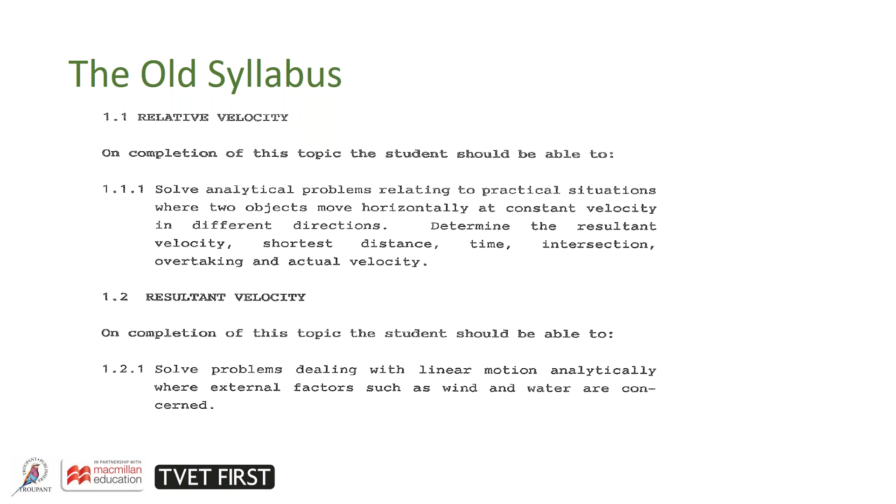Now, the moment we start comparing the new syllabus, if we look at the first part, it gives a general aim. On completion of this module, students should be familiar with solving analytical problems relating to practical situations where two objects move horizontally at a constant velocity in different directions. Students must be able to determine the resultant velocity, shortest distance, time intersections, overtaking, and actual velocity.

Now this, as we see, is what an outcome-based syllabus is. The focus on outcomes creates a clear expectation of what needs to be accomplished. So at the beginning of the syllabus, we have a clear general aim on exactly what should be accomplished.

The syllabus is written in the format of a table. On the left-hand side, numbered, is your learning content, and on the right-hand side is your learning outcomes. And it says students must be able to. So it comes back to the second point: students will understand what is expected of them, and of course teachers will know what they need to teach during the course.

Every learning outcome is clear. Solve problems dealing with constant linear motion analytically, calculate, do calculations, etc. Instructions in the syllabus are very clear. It shows the bounds of how far a lecturer should go when teaching.

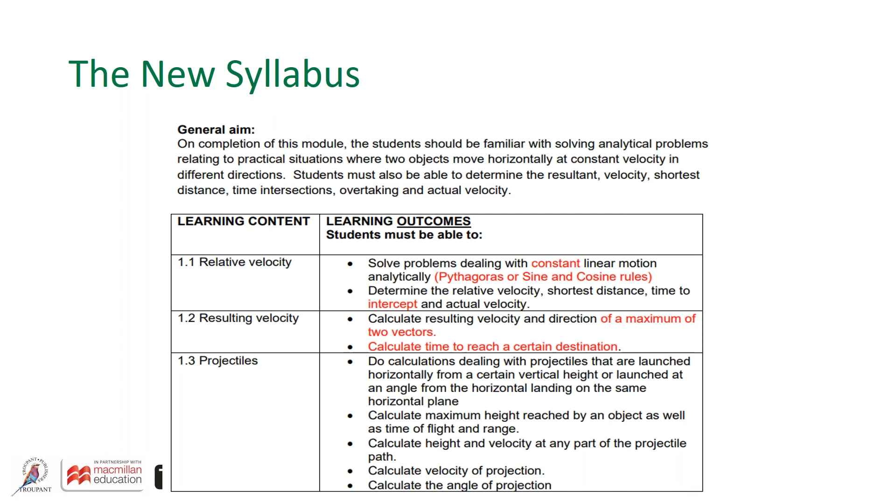The general aims of the new syllabus: students should be able to build on the basic knowledge attained in engineering science N1, N2, and N3. So it is a continuation of engineering science from N1, N2, and N3. Students should understand each basic scientific principle, and should be able to integrate knowledge of various systems and components in their applied subject.

I will speak a bit more on this shortly. Specific aims: to introduce students to apply the scientific principles mastered to his or her specific trade theory, be able to apply SI units and derived units correctly, demonstrate understanding of the subject content through application of acquired knowledge, and be able to solve problems using subject content.

Now, to understand the subject, as I mentioned, engineering science is not a trade on its own. What we are doing here in engineering science N4 is preparing the learners, firstly by building on their knowledge, and secondly by teaching them how to apply the scientific principles and SI units, all in order to use this in the trade they are studying. So if they are studying mechanical engineering, we are setting the basis for the calculations that will be used in mechanical engineering. If they're studying electrical engineering, the same applies.

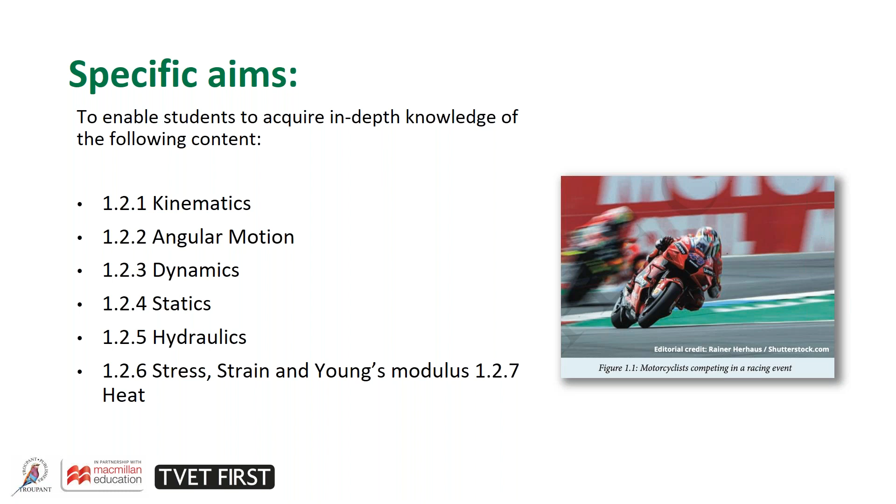Now, comparing the learning content with the new curriculum compared to the old curriculum, you will notice very subtle changes in the percentage weighting, and the names of the topics have not changed at all. Topic 1, kinematics, was 12% of the total, and it's now changed to 15%. Angular motion used to be 9%, it is now 12%. Dynamics used to be 12%, it's now 14%. Statics remain the same at 15%.

With hydraulics, we see a relatively significant drop from 20% to 15%. Stress strain and Young's modulus remain the same at 14%, and heat remains the same at 15%.

So at this point, if you were worried about the new syllabus, whether you should actually be going and doing some further studying in university and stuff, I'm here to tell you that's not necessary. The topics are the same. There are slight adjustments with the nature of the questioning, but the major change in the syllabus is that the outcomes are clear.

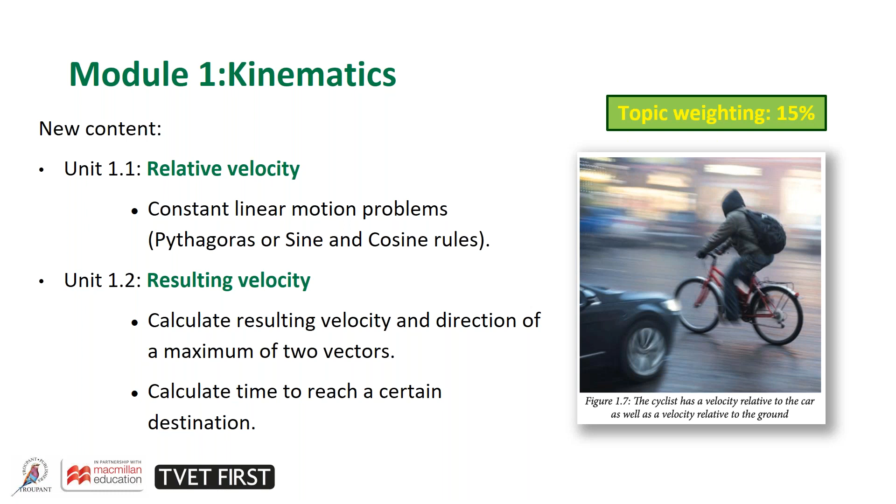Unit 1.2, resulting velocity, calculate the resulting velocity and direction of a maximum of two vectors. Calculate the time to reach a certain destination. Unit 1.3, projectiles. Calculate projectiles that are launched horizontally from a certain vertical height, or launched at an angle from the horizontal, landing on the same horizontal plane. Calculate the maximum height reached by an object as well as the time of flight and range. Calculate the height and velocity at any point of the projectile path.

In our title, N4 Engineering Science, our module 1, we have allocated 32 pages of content for the section. We have 18 fully worked examples, 4 activities, 1 summative assessment, a module summary, and like all our modules, we have video and resource links.

Now, all our topics, we begin with the starter activity and an overview. A starter activity is something that sets the scene for the topic. The starter activity may not be a specific scientific question, but the question encourages thinking about the topic and gives the learner a sense as to exactly what we are going to cover in the topic.

There is a lot of technical terms in engineering science, yes, and for this reason we clearly have definition text boxes giving the definition of a term. Now we must remember, there are a lot of artisans that have been in industry for 20 or 25 years, and they've been sent by their company for reskilling. We consider these people when we are writing the book, knowing that a lot of these terms may be new to them. It would not be fair to go on writing and discussing a term without explaining it.

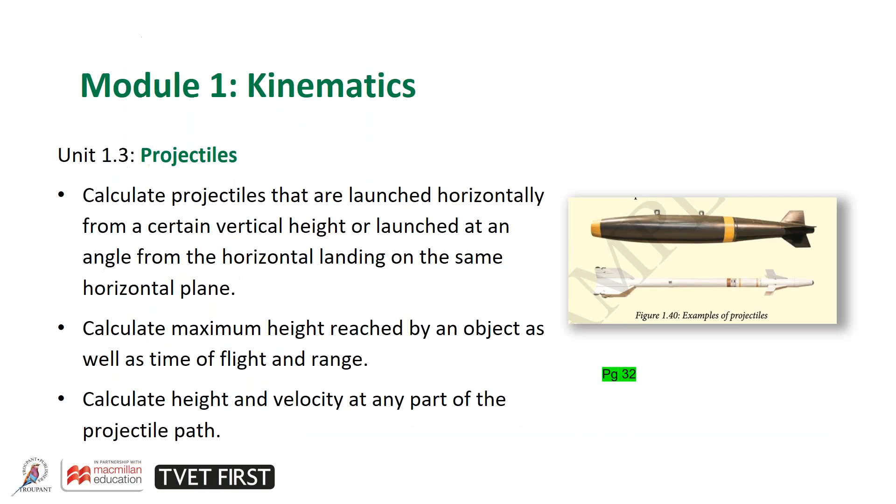Now, coming to this point here, 18 fully worked examples. It is very rare in an engineering book that you will see so many examples. But the vision that we have is that we do not want to leave work for the learner. We want to give the learner as much of the examples as we possibly can. We do not want to do the situation where we do two examples and say the rest you just need to change the subject or formula, or change this value. That's not what we intend. We intend to give as much knowledge as possible to the learner.

In doing this, as a lecturer, we are giving you maximum support. You do not have to have our book and go and do other research and find other examples. We are covering with these 18 examples in this topic most, if not all, of the scenarios. And if you look at our solutions, there are no spaces in between. We're not leaving parts to skip steps and just get to the final answer. No, that's not what we are doing. We are giving it step by step. We are breaking down the calculations. Further, we are even graphically representing the answers. Our aim here is for the learners to pass, and in doing so, we are also giving the lecturers the support.

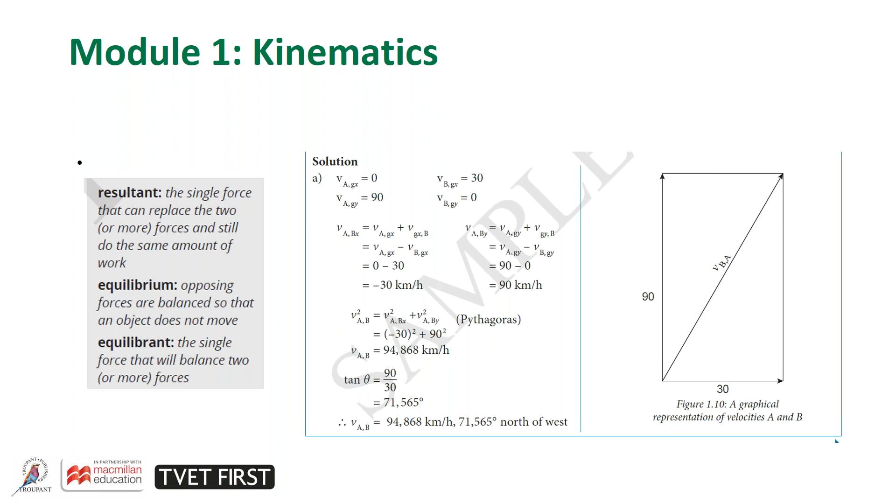Looking at Module 2, Angular Motion, new content, Unit 2.5, Torque, Work Done, and Power. Calculate accelerating and decelerating torque if the moment of inertia of an object is given.

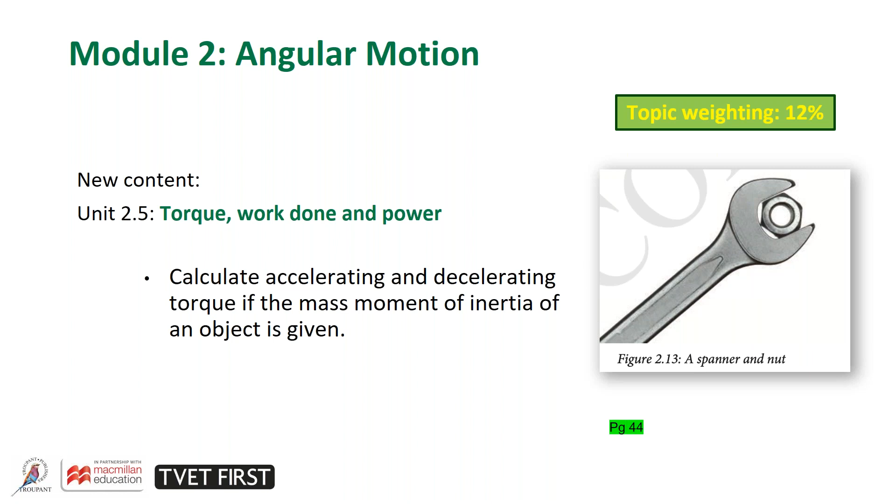There is 18 pages of content in this particular module. It is 12% of the total weighting. There's 8 fully worked examples, 3 activities, 1 summative assessment, 1 module summary, and of course video and resource links.

You will notice in this module and throughout the book, we have photographs of the various objects and things that you would find in this topic. Bear in mind, some learners have never seen a flywheel in their life. It is our duty as lecturers to do our best to demonstrate, to illustrate, and explain exactly what a specific thing may be.

I've also just extracted a picture, a diagram from the module, and you'll see that throughout this book, and particularly in this module, we are explaining by means of diagrams, by means of pictures and graphs.

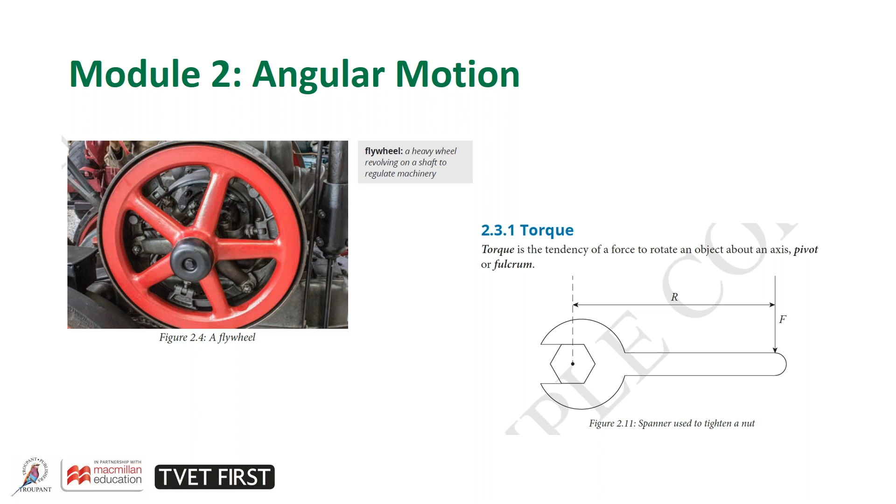There's 3 activities. Now let me touch on these activities. These activities are strategically placed in the module. We don't expect as a lecturer and as a student to go through the whole module to keep learning, and not actually assessing yourself. These activities are strategically placed at intervals where we can test the learner to see how far the learner has come and whether the learner understands.

The activities are in the student book in the form of questions, and the answers are in the lecturer's guide, which I'll touch on later. The activities is a good instrument for you to measure the progress of your learners. It can be used to see whether learners are coping, whether some sections need to be retaught, and it can even be used by you as a lecturer to base your questions when you are setting tests.

Module 3, Dynamics. Unit 3.1, Newton's 3 laws of motion. Apply Newton's second law of motion. Sketch free body diagrams of vehicles traveling on horizontal or inclined planes while moving at constant speed, accelerating or decelerating. Calculate the tractive effort and braking effort required for motion on horizontal and inclined planes with regard to practical problems, including gravitational force, rolling resistance force, and inertia force.

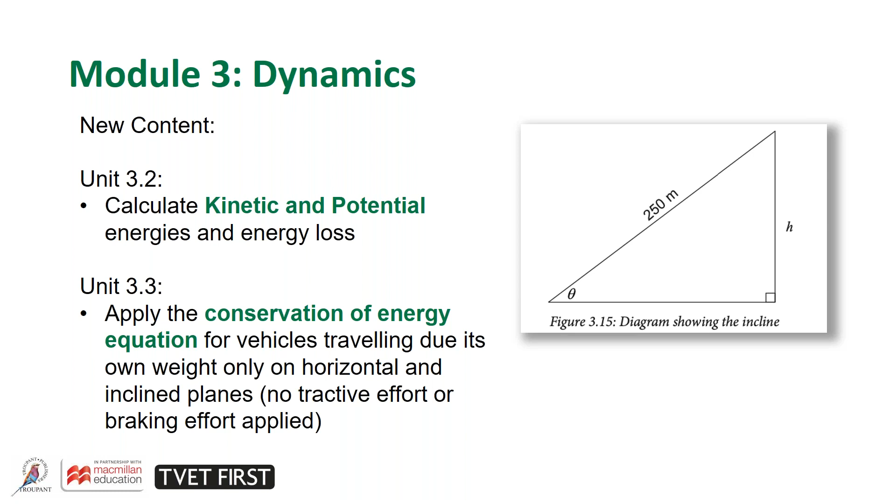Unit 3.2, calculate kinetic and potential energies and energy loss. Unit 3.3, apply the conservation of energy equations for vehicles traveling due to its own weight on horizontal and inclined planes, no tractive effort or braking effort applied.

In our book, when it says sketch free body diagrams of vehicles, you will find that for every example requiring this, we have sketched free body diagrams using computer-aided programs to draw this. We are not leaving it to the lecturer by merely putting the example without the diagrams. We're giving as much possible information for you, the lecturer, and for the learners to grab onto.

There's 24 pages of content in this particular module. There are 13 fully worked examples, 3 activities, 1 summative assessment, 1 module summary, and 1 video and resource link. This topic is 14% of the 100%.

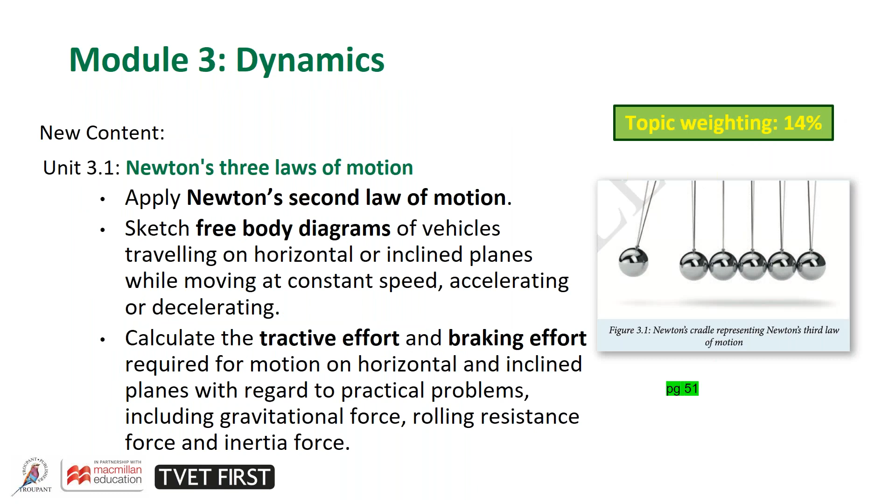I will use this module to explain the concept of the summative assessment. As the activities assess the learners at intervals, the summative assessment is a tool and a test basically at the end of a module. So once you have completed the module, once you have done, in this case, the 3 activities, you now, as a lecturer, can give the learner the summative assessment to do.

Now, the summative assessment will not just cover one particular part of the module. The summative assessment will cover the entire module. And when the author wrote these questions for the summative and, of course, for the activities, knowing that our author has been an examiner for many years, he knew exactly the type of questions to ask the learners to test whether the learning outcomes have been achieved in this particular module.

The summative assessment questions are similar to examination questions. There are marks allocated to each question, and the answers for all of the questions are in the lecturer's guide.

If we look at this, I've taken an extract from module 3 on the dynamics. Apart from teaching the learning outcome, in our book, we also have tips to help solve problems. As I mentioned, our author is very experienced in lecturing and assessing the subject at a national level. So the tips that he is giving here is based on his experience on where learners are lacking or where learners can improve. Like for this one, an example, it says tips to help solve problems, sketch the diagram and indicate all forces. So obviously this tip is based on his experience on what learners have not been doing.

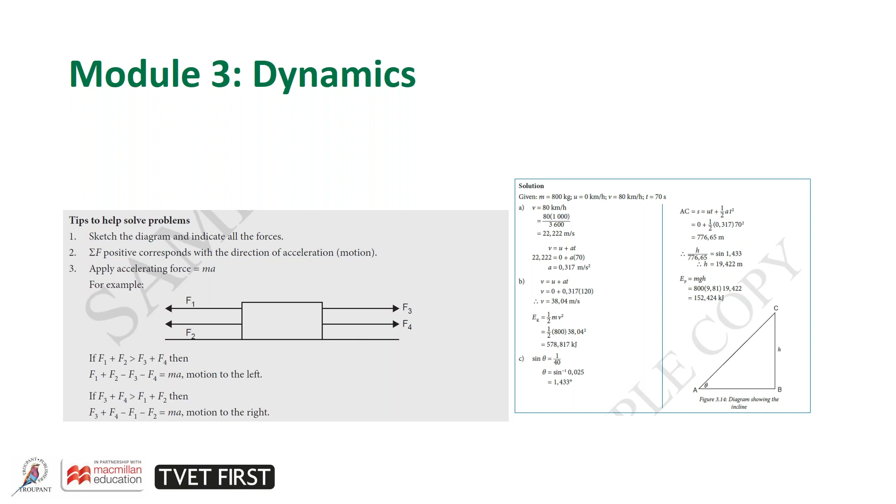Module 4, statics. New content, Unit 4.1, simply supported beams and cantilevers with point loads and uniformly distributed loads. Calculate the point of inflection. This has been moved from N5 to now N4. The topic weighting is 15%. If you look at this module, 44 pages of content is covered.

One of the reasons for that is, considering Unit 4.1, simply supported beams, cantilevers with point loads and uniformly distributed loads, we as lecturers know the combinations of examples that can occur here. We could have an example with point loads only. We could have an example with uniformly distributed loads only. We could have one with point loads and uniformly distributed loads. We could have a cantilever. The combinations here is really a lot.

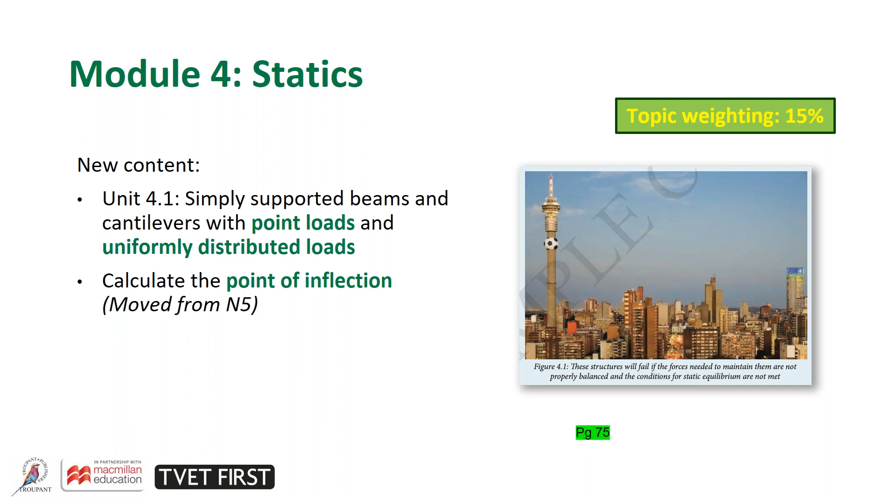So considering this, we have 14 fully worked examples for statics in module 4. And you'll notice our activities for this module has increased to 4 activities, because we know the nature of this particular module. Learners need to be assessed step by step to check their progress. 1 summative assessment and 1 module summary, video and resource links, of course.

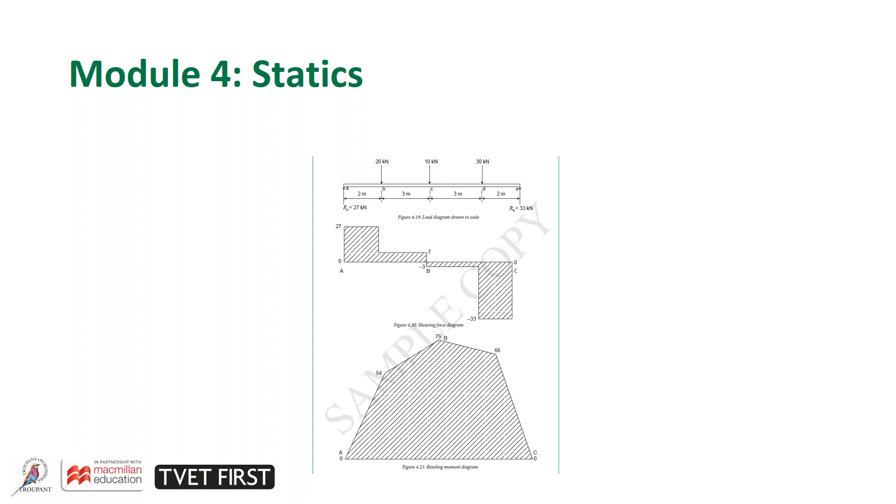Now, what I found in previous engineering books, the shear force diagram and the bending moment diagram was not always done. It was done maybe for one example, and it was left to the learner to figure out the rest of the examples. In our book, we made sure that where required, the shear force diagram and the bending moment diagrams were clearly drawn and in line with the beam. So learners were not lost along the way. Learners were not required to do their own drawings and have nothing to compare it with.

Module 5, hydraulics. Okay, this is the topic that has dropped by 5%. And even though it dropped by 5%, you will notice there still is a lot of content that needs to be covered. 40 pages of content was covered in this module.

Hydraulic pumps: calculate the theoretical and actual flow rate of reciprocating pumps. Calculate the rotational frequency of a pump to deliver a given flow rate of water. Calculate the time taken to fill or empty a reservoir for a given flow rate. 5.3, hydraulic accumulators: name the types of accumulators. State the functions of an accumulator in the hydraulic system.

As many of you are lecturing in engineering science, we will know this is one of the biggest topics that has ever been in engineering science. The fact that it has dropped by 5% of the overall percentage does not really affect how big this particular topic is. Hence, as I've mentioned, we have covered 40 pages of content.

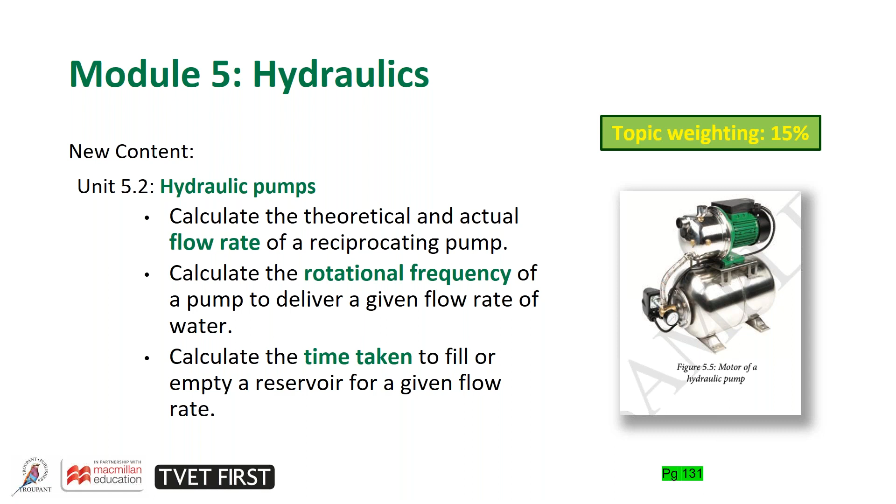But the amazing thing in this particular module is that we have 20 fully worked examples. Yes, that's right, 20 fully worked examples. We understand the nature of this module. We understand exactly how many types of examples need to be covered. And hence, when the author wrote this book, he put in 20 fully worked examples. For those of you who have been lecturing this for many years, we understand the nature of questions that can occur. It's a topic that opens up to various questions, and sometimes we've all been learners at one stage.

We face a point as learners where we start leaving out things because we have to go and look for the answers or look for the examples. It's also for this reason that we have put so many fully worked examples in this particular module. There's 4 activities, 1 summative assessment, a module summary, video and resource links, of course.

Now, this topic is based on hydraulics, which is not something that can be easily demonstrated in the workshop environment in a TVET college. It's for this reason that we have various illustrations. This is just one of the illustrations from this particular module. We have these illustrations to show the learners, apart from talking the mathematics and the scientific calculations based on these hydraulic problems, we want the learners to see and understand what these instruments and machines are.

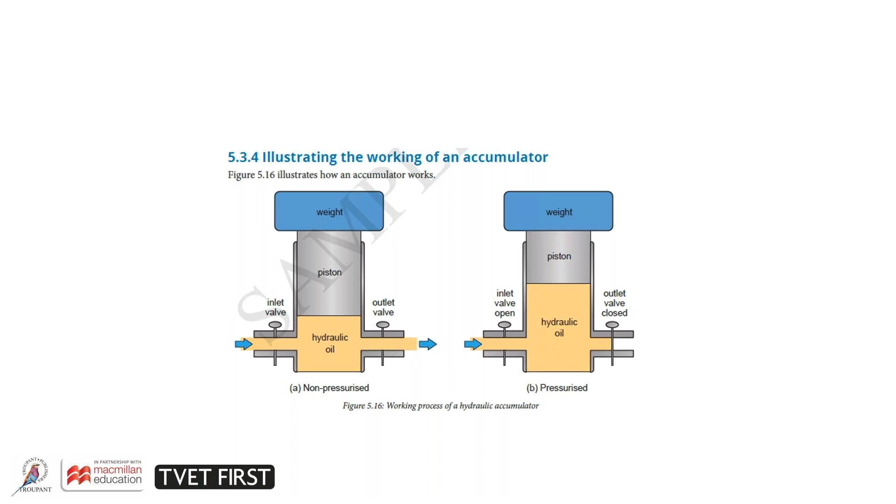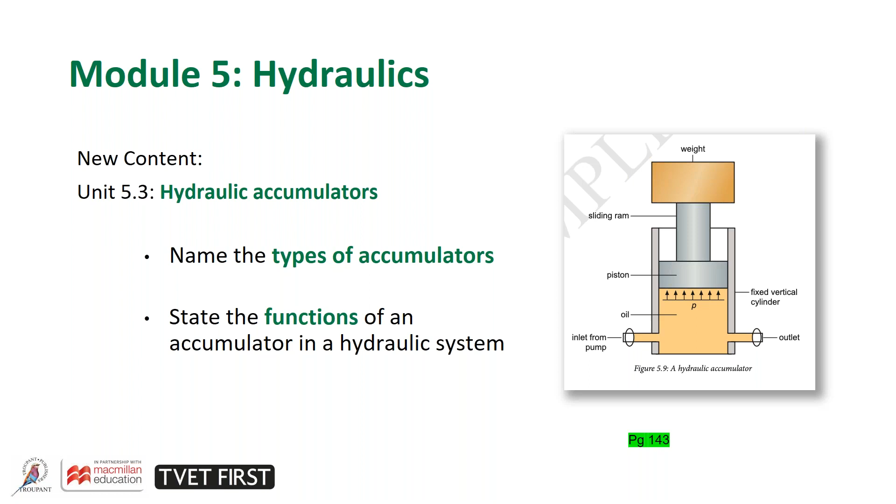In the older textbooks, based on the older syllabus, the drawings were mainly done in sketch, without much detail. But we aimed, even if you look at this drawing, to give the learner as much detail as possible. Because as we know, even looking at this picture here in front of me, calculations are based on the piston, the sliding ram, etc. It makes no sense to write this as a sentence and expect the learner to do the calculations without having a picture of exactly what these machines are.

Module 6, stress, strain, and Young's modulus. The new content, compound bars are now included. Stress types: name the 3 main types of stresses. Calculations on stress, strain, and Young's modulus. Unit 6.2, Young's modulus. Calculate change in length or total change in length for compound rods.

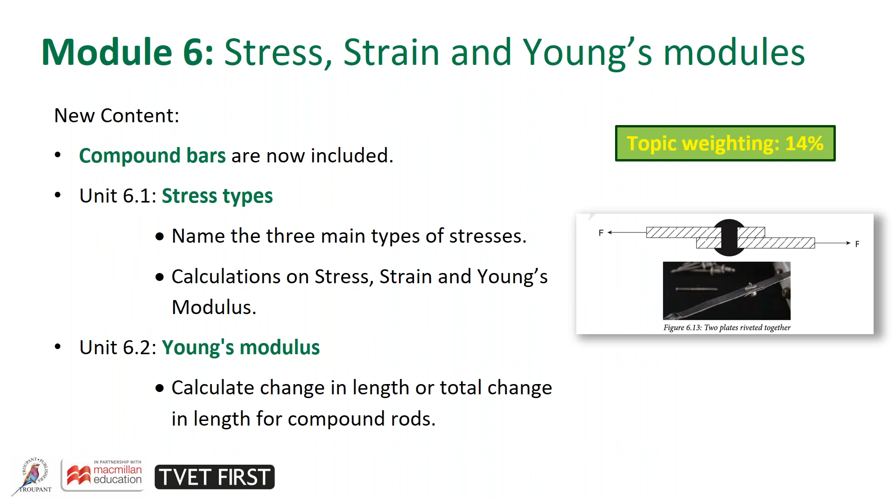It is one of the smaller topic weightings, which is 14%, and it's also a topic that has a lot of calculations, but not a lot of theory. Hence, 26 pages was dedicated to the content of this particular module. There is 15 fully worked examples, 3 activities, 1 summative assessment, the module summary, of course, video and resource links.

Now, what we also found in this particular module is that learners really needed to be shown in a practical way what are the things we're talking about. Like, we often talk in class about a cantilever beam, and we don't understand what it is, or cantilever with a transverse load, for example. As much as we can try to draw it on the board or put a sketch, the best thing would be to see it in reality, and the second best would be to have photographs.

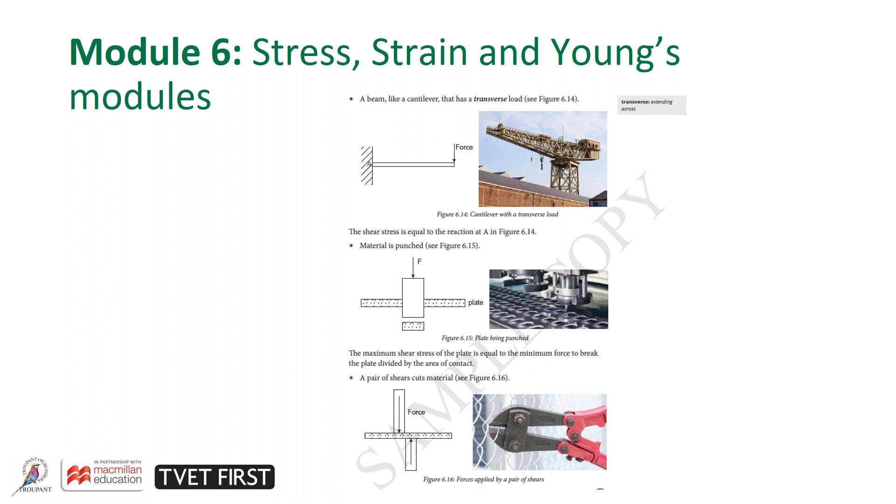In this particular module, there is quite a few photographs. We are trying to explain to the learners practically exactly what we are talking about. If you look at also this example, figure 6.15, when material is being punched or a pair of shears cuts through material. The nature of this module, there is different ways of asking questions, and we have 15 fully worked examples in this particular module.

This would bring us to heat, unit 7.1, volumetric changes in solids. Calculate the volumetric coefficient of expansion given the linear coefficient of expansion. Calculate the change in volume and final volume due to temperature change. Calculate the percentage change in volume.

Volumetric change in liquids. Explain the anomaly in the expansion of water. Calculate the change in volume and final volume. Calculate the change in the level of the liquid in a container due to temperature change. Calculate overflow in a container filled with liquid due to temperature change.

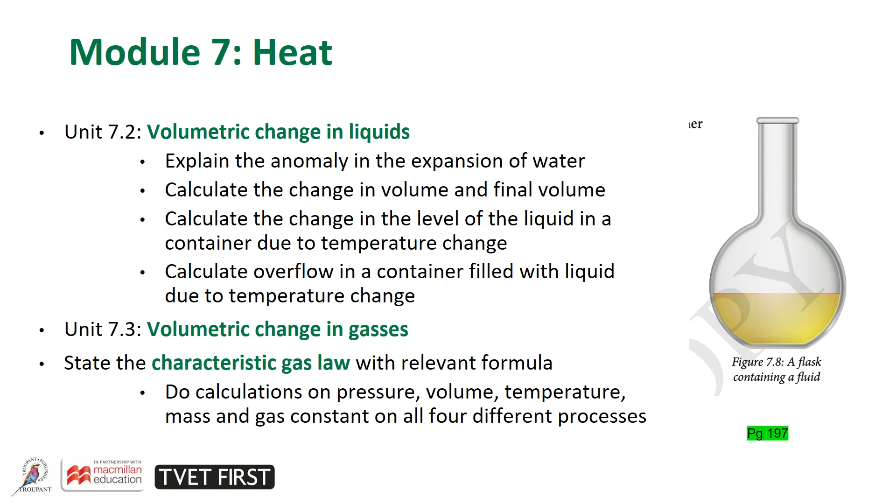Unit 7.3, volumetric changes in gases. State the characteristic gas law with relevant formula. Do calculations on pressure, volume, temperature, mass, and gas constant on all 4 different processes. Gas processes: define the 3 basic gas processes: isochoric, isobaric, and isothermal. Sketch the PV diagrams. Do calculations on work done, change in internal energy and heat flow. Sketch PV diagrams of a maximum of 2 successive gas processes. Do calculations on work done, change in internal energy and heat flow for the 2 successive processes.

Now that was quite a mouthful. I even have to take a deep breath before I change the slide. And for that reason, you will find there are 26 fully worked examples. I will say this again: it is very rare in an engineering book, or any book for that matter, to find as many as 26 fully worked examples. If you look at these slides that I've just read on heat and the extent of the syllabus, this was considered when the author wrote these 26 fully worked examples.

We do not want to put the learner in a situation where he or she is searching the internet or searching some other resources to find answers. For an example, we do not want to put you as a lecturer in a situation of being under pressure, which undermines maybe whether you can teach or not. We believe you definitely can teach. It's for these reasons we have put these 26 fully worked examples in this particular module to make sure that we are covering the syllabus thoroughly.

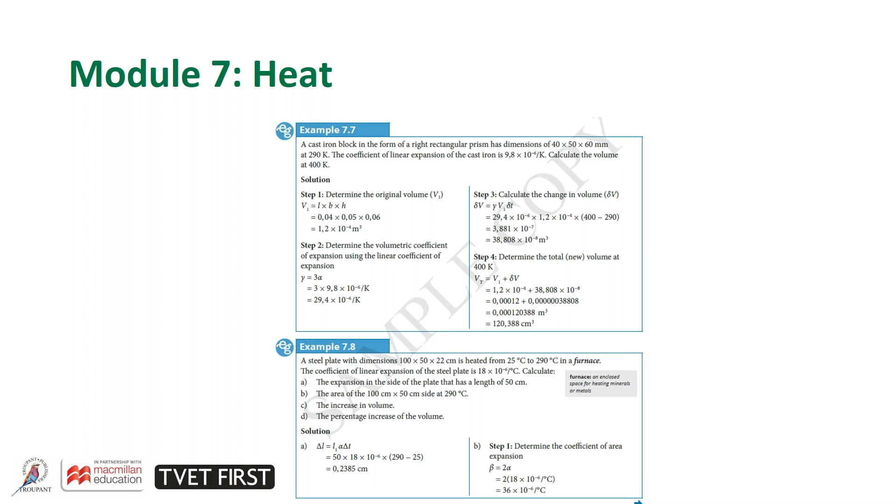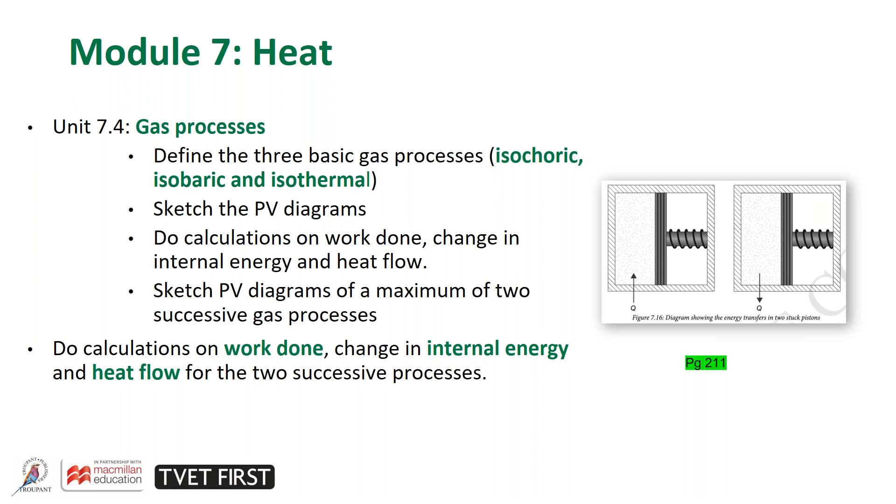For heat, to draw sketch PV diagrams. In our book, we have a lot of diagrams, which makes it easier for the learner to reproduce these diagrams in the examination. Overall, this is one of the biggest modules with 42 pages and 26 fully worked examples.

Okay, that basically covers the content of the new syllabus and how the content was covered in Engineering Science N4. Now let's look at the assessment criteria.

The ICASS trimester mark for Engineering Science N4 from 2022 going forward: 2 formal class tests for full-time and part-time students, or 2 assignments for distance learning students only.

Now, it's very important for me to mention this part about distance learning. There are a few centers in South Africa that qualify as distance learning centers. A distance learning student and a part-time student are not the same thing. A part-time student is a learner possibly doing one subject or not attending all the lectures, but not classified as a distance learning student. When you enroll for distance learning, your code in the enrollment form is distance learning.

Distance learning students are allowed to write 2 assignments instead of 2 tests. Whether you write the 2 assignments or the tests, you have to obtain a minimum of 40% in order to qualify to write the final examination.

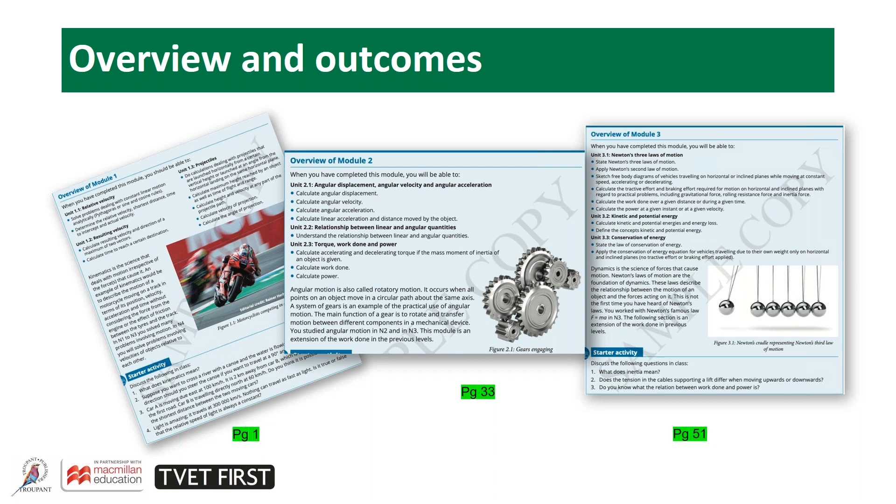Outcome-based learning is a beautiful thing compared to how we were taught in the past. The learner was always in the dark, had no idea what was coming, and had to just stay along for the ride from the beginning of the module to the end. We also have the starter activities, which I will discuss shortly.

Special features: starter activity. The starter activity is designed not to have marks. It's there to immediately encourage and stimulate thinking in the learner's mind. For example, discuss the following questions in class. We're encouraging discussions, we're encouraging learners getting together. What does inertia mean? Does the tension in the cable supporting a lift differ?

Further, in the starter activities, we try to incorporate real-life situations. For example, here from page 1, question 2: suppose you want to cross a river with a canoe and the water is flowing due south. In which direction would you steer the canoe if you want to travel at a 90-degree angle? So in the starter activities, we also try to be very practical. Some of them have diagrams in it. It's very unique in that before you even get into the topic, the learner, just by having a discussion and a quick think about something, already is on track with what the topic is about.

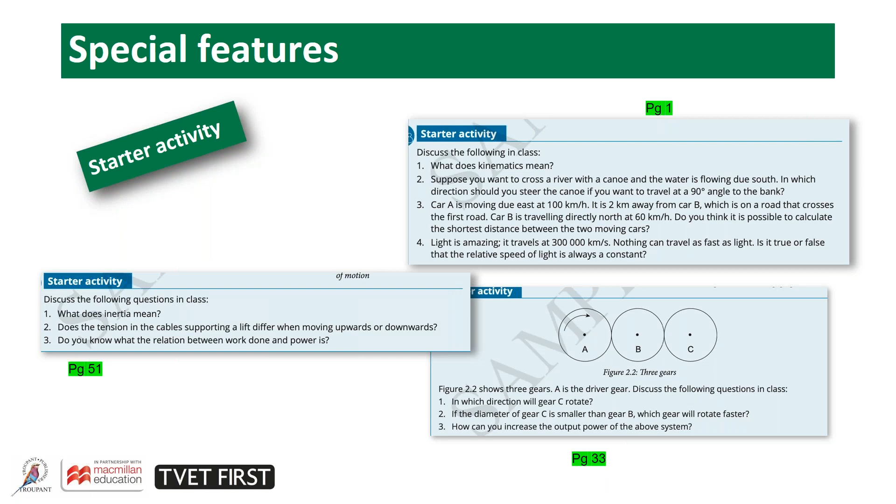Special features: examples with solutions. Now, to me, I studied engineering, as many of you have, and if you think about your engineering books, very few examples were fully worked. That is the truth. University level, even TVET level, the older books, steps were skipped out. We just jumped from the question, one line, and then we were gone to the answer. That is not happening in our book.

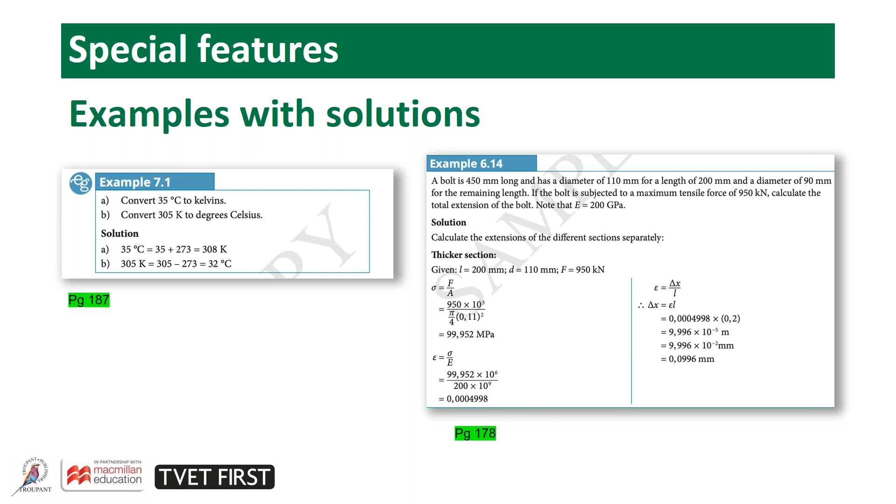This is a great tool for you as a lecturer. You do not have to search for answers for a particular question. The answers are all in the book.

The activities, which I spoke about earlier, are spaced at strategic intervals in the module. For example, activity 1.1 is after you've covered unit 1.1. These activities all have a mark allocation. They are written in the format that you would find in the examination, so it's very formally written. The questions are well thought of, and these questions are all original questions by the author.

At the end of a subunit, you can take this activity and test the knowledge of your learners. And as I mentioned before, you can even use these activities for setting your tests by changing maybe the figures or changing the scenarios a little bit.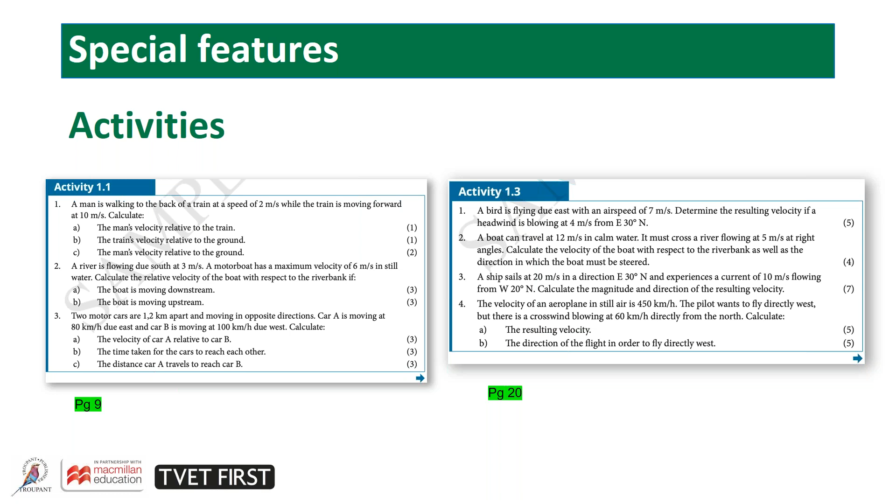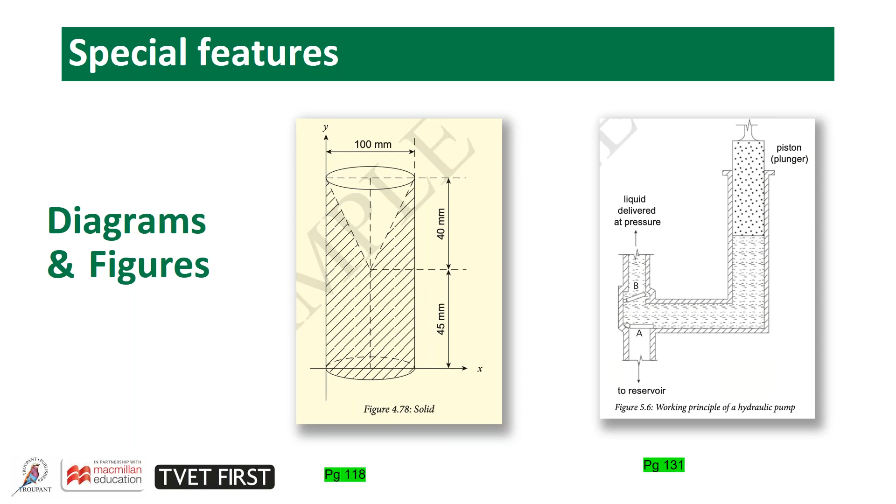Throughout this book we have diagrams and figures all drawn on computer, no ambiguous or vague diagrams, clearly labeled, clearly dimensioned diagrams which were well researched. We understand that learners cannot learn from text alone. Learners need to create a photographic memory in their brain, and these diagrams and figures help to achieve that.

Throughout the book, apart from the diagrams and figures, we have real photographs of real situations to further help the learner understand and also put the learner in a practical situation. When we talk about a question, for example, calculating which way should the canoeist row, it's good for the learner to have a picture of a canoe in water to understand exactly what the question is asking.

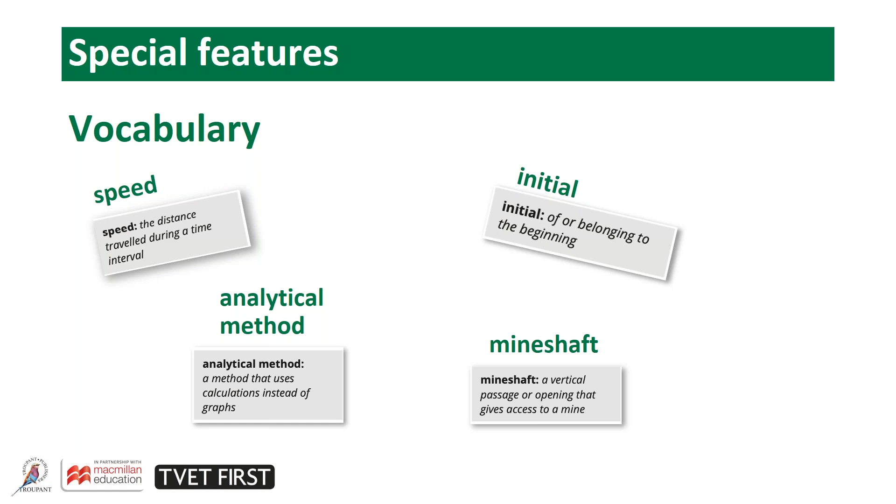Throughout the book we have definitions of terms, like speed: the distance traveled during a time interval. So the learner doesn't have to wait and read the whole module and go back and search in a paragraph, where did I see speed? No, these text boxes are placed throughout the book. It's also something that is very rare in an engineering book to find all of these definitions just popping up. But we know as lecturers, it's very important for the learner to understand exactly what a term means in order for them to do any calculations based on these terms.

Our author, as mentioned, has been an examiner for many years and has put in exam tips throughout the book in every module. For example, this exam tip in the middle: always write down the original formula first, then manipulate, then substitute in the given values.

The author has great knowledge of where learners went wrong in exams in the past and knows exactly what is required for the learner to perform well. These exam tips throughout the book will really help the learner, since sometimes a learner forgets the smallest of things, for example, that a radian is 57.3 degrees. These tips will help not only the learner, but you as a lecturer while teaching, to remind learners of these particular points.

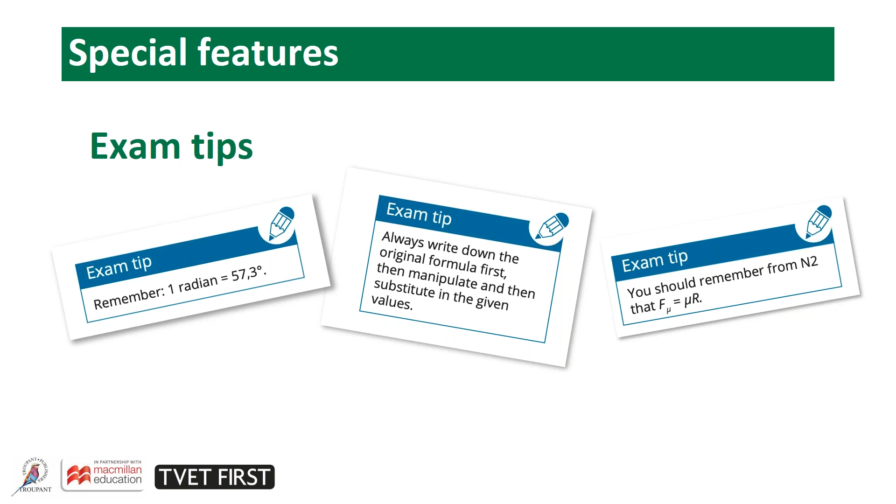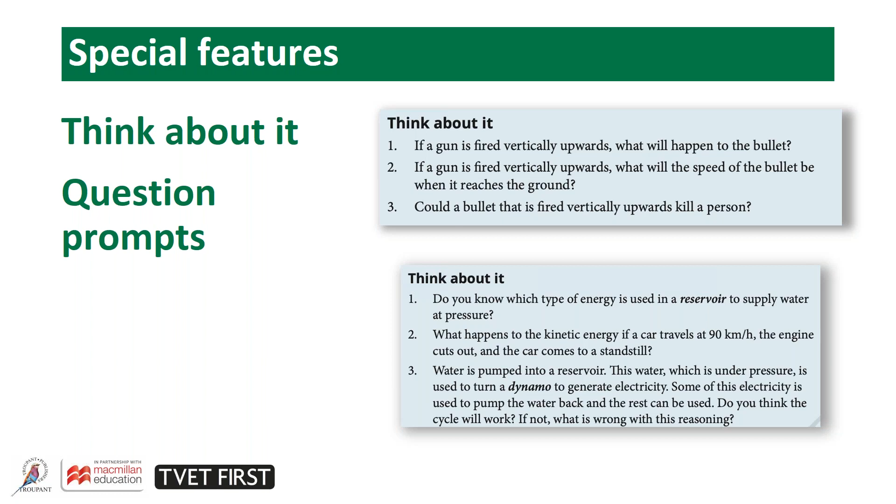We also have 'think about it' question prompts. For example, if a gun is fired vertically upwards, what will happen to the bullet? We at all times want to encourage learning by thinking, so it's not a situation where you as a lecturer just stand there and talk. There's got to be interaction, a learner thinking about a situation. These questions are not for marks; they're there to stimulate learning and help the learner understand a particular module.

The summary of each module: at the end of every module, all the work covered is summarized. Based on a lot of teaching theories, a summary is one of the most important parts of learning. At the end, it serves to recap for learners to understand exactly what they've been taught. Remember, we have the specific outcome and overview at the beginning, and at the end we have the summary to recap exactly what we've learned.

I've also found the summary helps a lot of learners who just forgot one section, and by looking at the summary, everything comes back to them. It's a shortened version of what was covered in the entire module. It can also be a tool for a learner to tick off what they understand and what they don't, and go back to recap on a particular part.

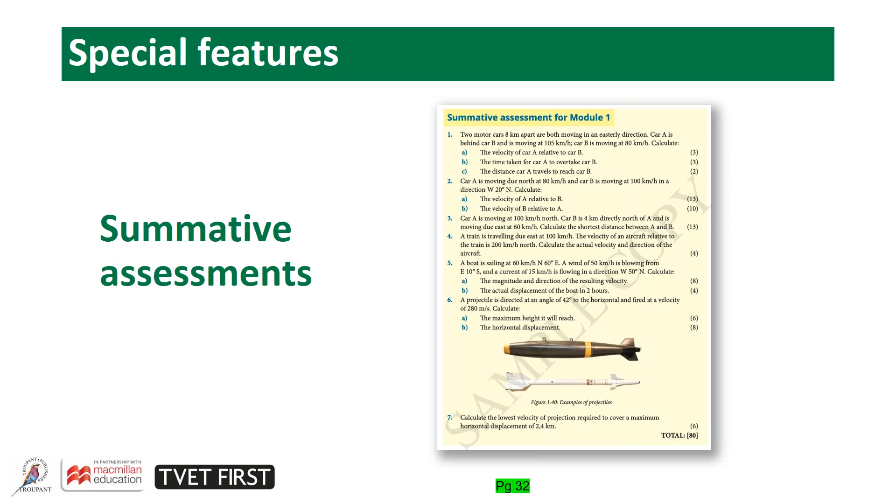The summative assessments, similar to the activity, are placed at the end of the module. You'll notice they are longer than the activities. Like in this case, for module 1, the marks are out of 80. It's based closely on examination questions. It'll help the learner self-assess how far they've come, and it can even be used by you as a lecturer to base your tests and exams around these questions.

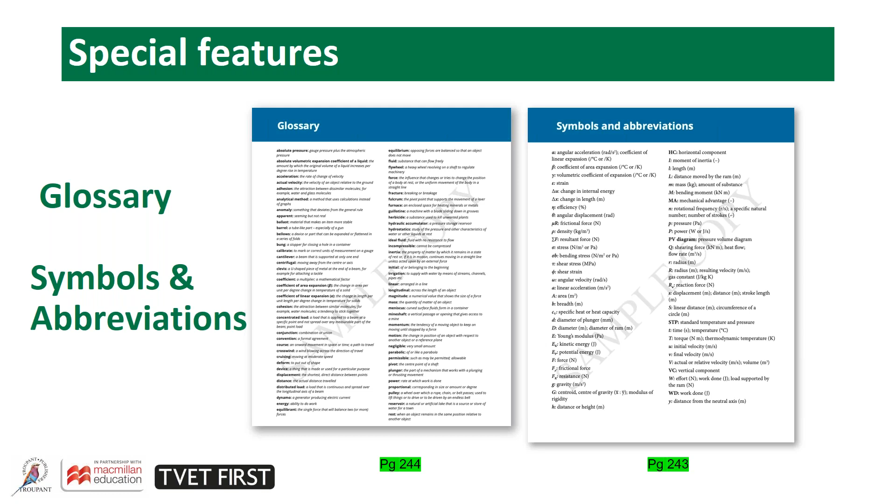We have a glossary and symbols and abbreviations, as all our textbooks do. As we talk throughout the book about certain terms, and as much as we put in as many definitions as possible, it's very important to have a glossary to define everything we've spoken about. We know in engineering and maths especially we use a lot of symbols and abbreviations. If a learner is confused about a symbol, they can turn to the back of the book, in this case page 243, and see exactly what each symbol or abbreviation means.

Practice examination: apart from our activities and summative assessments, the textbook also has a practice examination. This exam is set according to the weighting of the syllabus, so each section has a set amount of questions according to the percentages, and it's out of 100. It's a great tool at the end of the course—while summative assessments come at the end of each module, the learner can write this practice exam at the end of the course to test how much they've learned and to see which part they're lacking before the real exam.

Lecturer's guide: now you may have been wondering, as I've talked about these activities, summative assessments, and practice exams, how you're going to get the answers. Well, the good news is our lecturer's guide has comprehensive answers. Once again, this is not your typical engineering book—our answers at the back are not one-word answers, not just the final answer like 25 degrees or 25 kilonewtons.

No—every question, whether it's an activity, a summative assessment, or a practice exam, has a comprehensive answer in this book. This is a tool that lecturers will be using; you will not be lost as a lecturer.